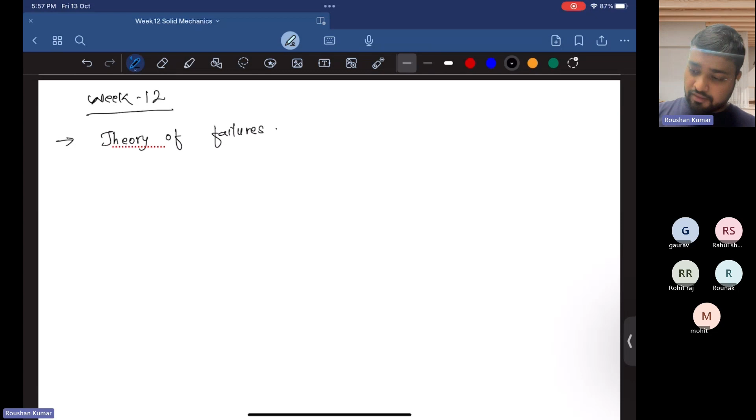So the first theory is the maximum principal stress theory. In this theory we have the maximum of lambda, that is lambda 1, is less than the yield stress of the material, i.e. the tensile yield stress of the material. So this is the maximum principal stress theory.

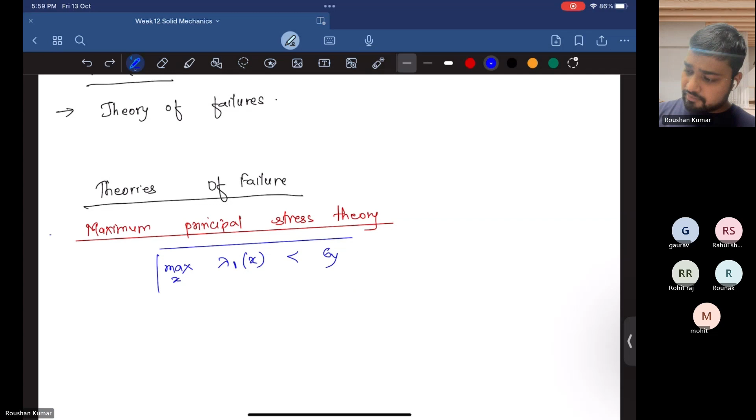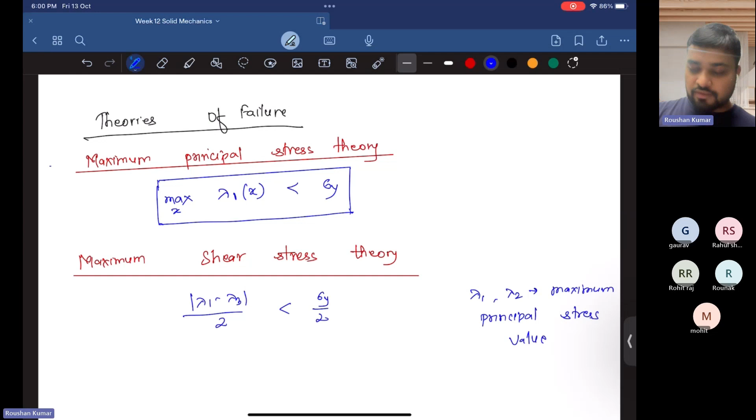Next is the maximum shear stress theory. In this theory we have lambda 1 minus lambda 3, divided by 2, is less than sigma y by 2. Here lambda 1 and lambda 3 are the maximum and minimum principal stress values. It can also be written in terms of yield stress in tension, or in terms of shear yield stress in shear, which is equal to lambda 1 minus lambda 3 upon 2 is less than tau y, which equals T into R upon J. So this represents the maximum and minimum principal stress values.

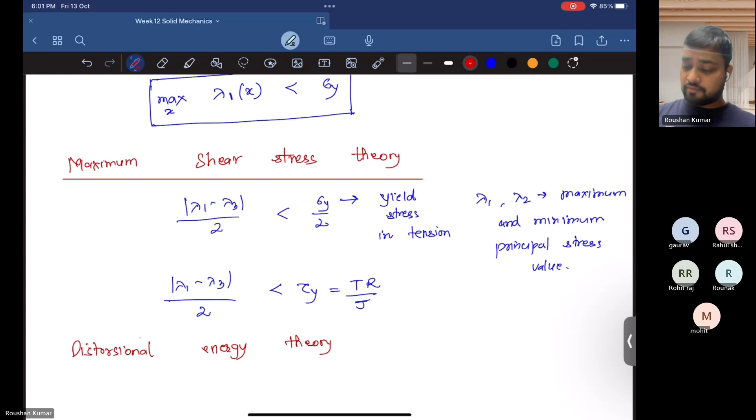The next theory is the distortional energy theory. In this theory, we write the expression in terms of distortional energy. Distortional energy per unit volume is given by total energy minus volumetric strain energy.

First, I will write the strain energy per unit volume. It is given by 1 by 2E times [sigma 1 square plus sigma 2 square plus sigma 3 square minus 2 nu times (sigma 1 sigma 2 plus sigma 2 sigma 3 plus sigma 3 sigma 1)]. This is the strain energy per unit volume, and the volumetric strain energy is given by a related expression.

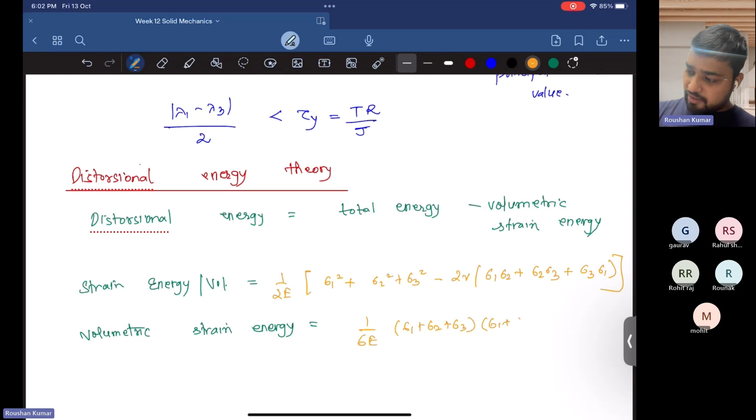Volumetric strain energy is equal to 1 by 6E times (sigma 1 plus sigma 2 plus sigma 3) times (sigma 1 plus sigma 2 plus sigma 3) times (1 minus 2 nu). Using these two relations, we can obtain the distortional energy. Finally, distortional energy is given by 1 plus nu by 3E times [sigma 1 square plus sigma 2 square plus sigma 3 square minus sigma 1 sigma 2 minus sigma 2 sigma 3 minus sigma 3 sigma 1].

So this is the distortion energy per unit volume. We can use this relation to calculate the yield value, that is the maximum stress value in the material. If only a uniaxial load is applied along one direction, the distortion energy becomes simply 1 plus nu by 3E times sigma 1 square, because the other principal stress values, sigma 2 square and sigma 3 square, become zero. Using the tension test, we can find the permissible tensile stress value.

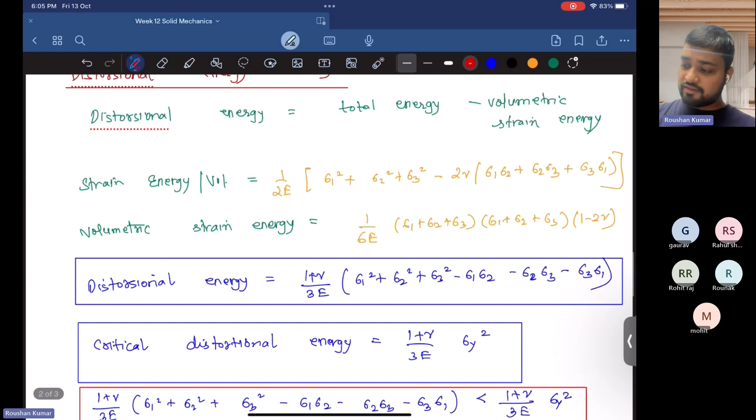We can also write in terms of yield stress in shear, just like the maximum shear stress theory. Using that, we can write: 1 plus nu upon 3E times sigma 1 square plus sigma 2 square plus sigma 3 square minus sigma 1 sigma 2 minus sigma 2 sigma 3 minus sigma 3 sigma 1 is less than 1 plus nu upon E times tau y square. So we can use this relation if we have given the yield stress in shear.

So this is all about the theories that we already discussed in the lecture. This is a problem solving session, so I have discussed only the formula part, meaning I only write the expressions here. For detailed derivation, you can look up into the lectures of this week.

The next thing discussed in the lecture, the last lecture of this week, is thermoelasticity. In that lecture, the concept of thermal stress and temperature coefficient has been discussed. I will just simply write the formula here. If you have to find the value of thermal strain, we can use one simple formula. So now we will be discussing thermoelasticity.

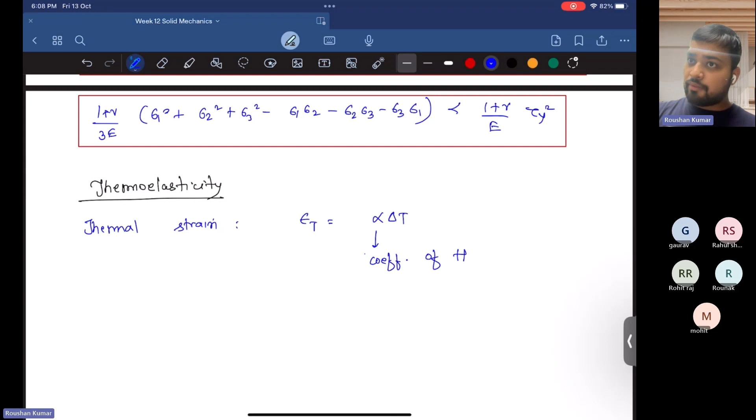So the thermal strain is given by this formula, that is thermal strain. Thermal strain, epsilon T, is given by alpha into delta T, where alpha is the thermal coefficient, that is, we can say, coefficient of thermal expansion, and delta T is the change in temperature. So thermal strain is given by this relation.

So the total strain is given by simply adding the value of the thermal strain. So to find the exact value of the strain happening in the body, it is given by mechanical strain plus thermal strain. So it is given by this relation.

Epsilon xx is given by 1 by E times sigma xx minus nu times sigma yy plus sigma zz, plus alpha times delta T. Similarly, epsilon yy is given by 1 by E times sigma yy minus nu times sigma xx plus sigma zz, plus alpha times delta T. Similarly, epsilon zz is given by 1 by E times sigma zz minus nu times sigma xx plus sigma yy, plus alpha times delta T. This is the final expression that we will use in the coming questions that I will discuss later on in this session.

So this is all about the week 12 theory part. In this week, two parts have been discussed: the first part is about the theory of failure, and the second part is about thermoelasticity. Based on these two topics, I will solve some problems right now, from basics to advanced, that will help you to solve the assignment problems covered in the solid mechanics course.

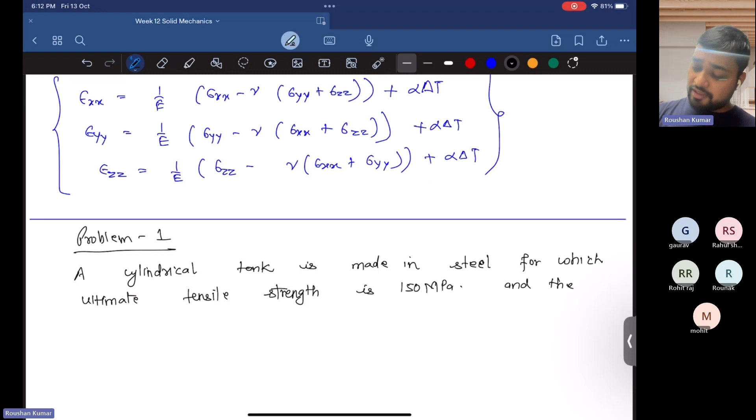For which the ultimate tensile strength is 150 megapascal, and the pressure inside the cylinder, and the pressure inside the cylinder is to be 1.3 megapascal.

So the question is, using theory of maximum principal stress, using theories of maximum principal stress, maximum shearing stress, maximum principal stress, maximum shearing stress, and distortional energy theory, and distortional energy.

Find the thickness of the cylinder. Find the thickness of the cylinder if diameter of the cylinder is: the first part is 1.5 meter, the second is 1 meter, the third is 0.5 meter.

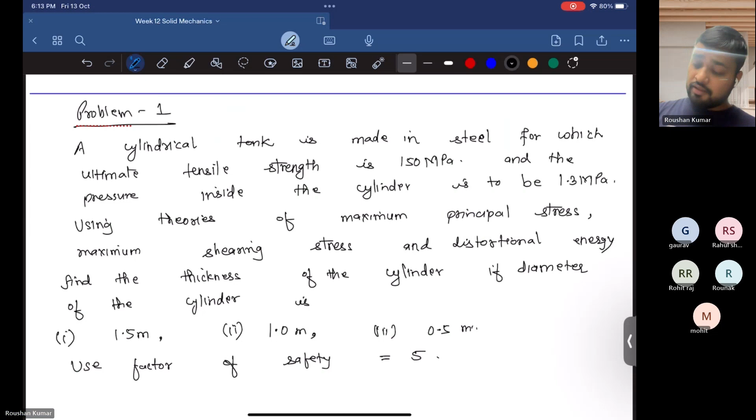So we have one cylindrical tank which is made of steel, which has ultimate tensile strength equal to 150 megapascal, and there is a pressure inside the cylinder of 1.3 megapascal. The question is, using the theory of maximum principal stress, maximum shearing stress, and distortion energy, we have to find the thickness of the cylinder.

And here we have given three diameters, that is 1.5 meter, 1 meter, and 0.5 meter, and for each we have to calculate the thickness of the cylinder. As we know that in a cylinder having internal pressure, we have two stresses: the first one is circumferential stress, and the second one is longitudinal stress.

So using that relation, we can simply find out the two tensile stresses. Both of these stresses are tensile in nature: the longitudinal stress and the hoop stress. So starting with the solution for this question.

Hoop stress is given by P into D upon 2T, where T is the thickness of the body, P is the internal pressure acting on the cylinder, D is the diameter of the cylinder. So what is P here? 1.3 megapascal. Diameter is D, times 2 into T.

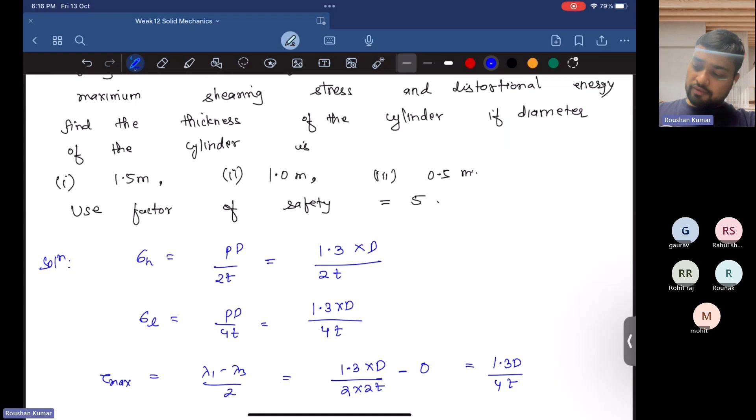Now we can see that the maximum shear stress theory, lambda 1 minus lambda 3 upon 2, and the maximum principal stress theory both give the same result here. Why is it same? Because both the stresses are in the same quadrant, that is the first quadrant, and the minimum principal stress here is 0. So we can say that the value of thickness coming out from the principal stress theory and the shear stress theory are both the same, because both stresses are in the first quadrant and the third stress, that is the minimum principal stress, is 0.

So we can write that in the first quadrant, where sigma H and sigma L both are positive, the maximum principal stress theory and the maximum shear stress theory are the same.

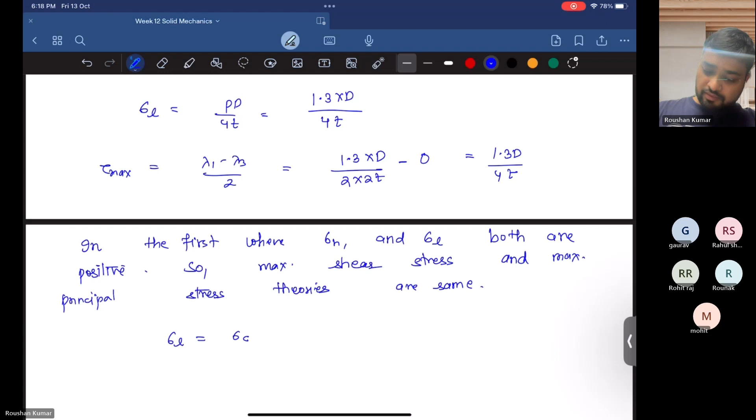So we can say that here longitudinal stress is equal to circumferential stress, and circumferential stress is given by ultimate tensile stress upon factor of safety, which is equal to 150 upon 5. The factor of safety is 5 mentioned there. So it is given by 30 megapascal. This is the yield stress in tension, or we can say shear, because here both the theories give the same result.

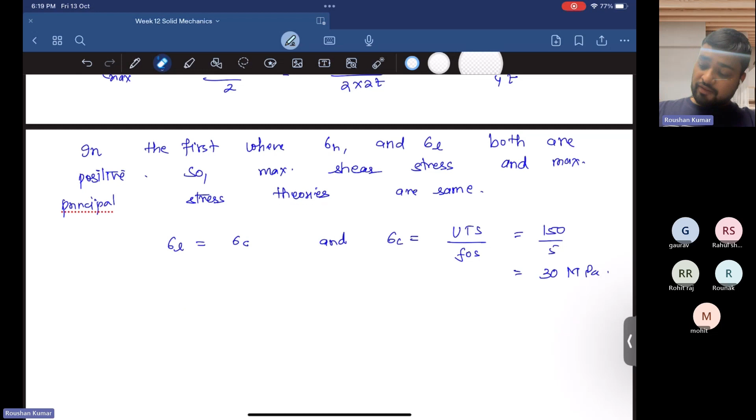Now we have the equation 1.3D upon 2T is given by 30 megapascal. Using maximum shear stress or maximum principal stress, both are same here, so I am using maximum principal stress theory. It is given by lambda 1 less than or equal to sigma Y. Lambda 1 is 1.3D upon 2T. Equating with 30 megapascal, it becomes 1.3D equal to 60T, and from here, T equal to 1.3D upon 60.

Now we have three diameter values, so we can use all the diameter values one by one. First case is for diameter equal to 1.5 meter, which is nothing but equal to 1500 mm. So T equal to 1.3 into 1500 upon 60, which is 1.3 into 25, so it becomes 32.5 mm.

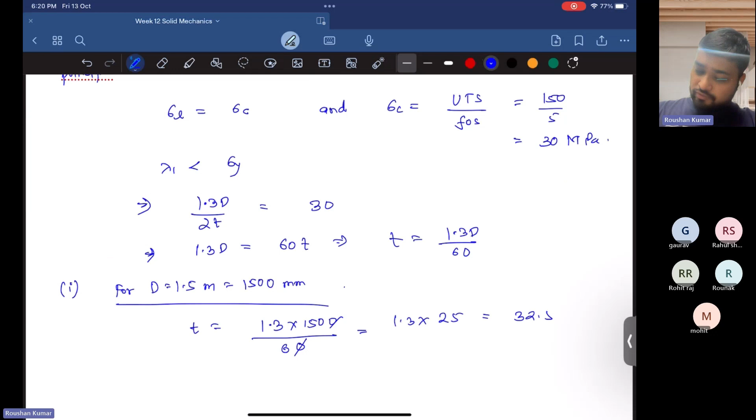The next case is for diameter equal to 1 meter, that is 1000 mm. So T equal to 1.3 into 1000 upon 60, which is approximately coming out to be 21.7 mm.

The next case is for diameter equal to 0.5 meter, that is 500 mm. It is given by T equal to 1.3 into 500 upon 60, which is coming out to be 10.8 mm.

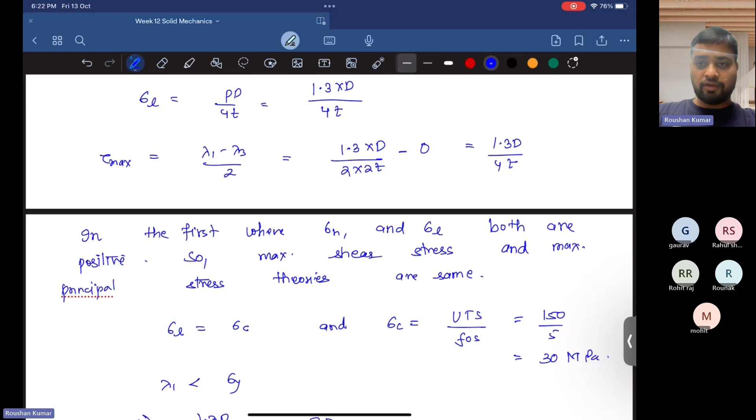So yes, this is all about the first part. The second part of this question uses distortion energy theory. So the question is using distortion energy theory, using distortional energy theory.

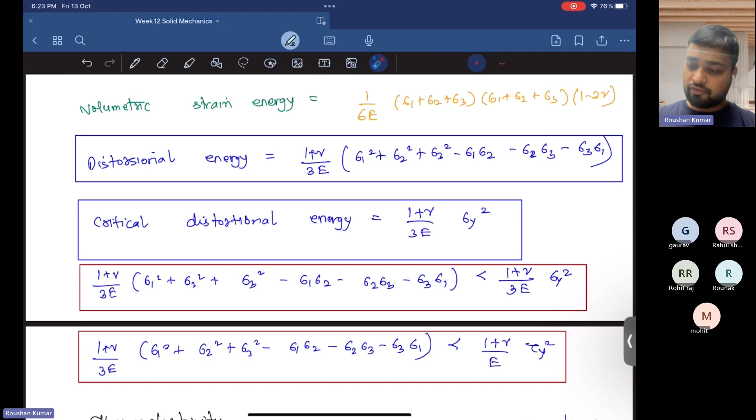So here we have only two principal stresses. The third principal stress is 0 here. So that's why we are using the concept sigma 1 square minus sigma 1 sigma 2. If you use that relation, as I discussed earlier, if you put the value of sigma 1 square and sigma 3 square, since sigma 3 square is 0, then only this will remain in the expression: sigma 1 square plus sigma 2 square minus sigma 1 sigma 2 is less than or equal to tau y square.

So sigma 1 square minus sigma 1 sigma 2 plus sigma 2 square equals sigma y square. And here we have calculated the value of sigma y, that is 150 upon 5.

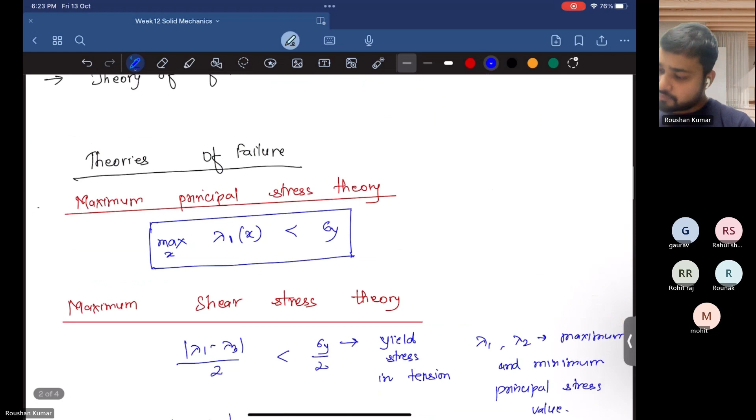We can also call it sigma y for your clarity, because in the above expression I am using only sigma y, so that's why I'm using a sigma y value. So it is given by sigma y. So sigma 1 square is 1.3d upon 2 sigma y, minus half into 1.3d upon 2 sigma y whole square, plus 1 by 4 into 1.3d upon 2 sigma y whole square equal to...

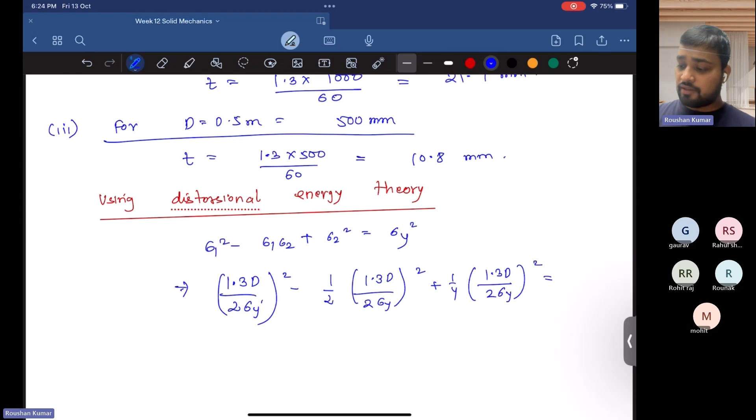So what I am doing here is simply using that relation: 1.3d upon 2t and 1.3d upon 4t. So 1 by 4 of 1.3d upon 2 sigma y, and I take sigma y value from the right hand side to the left hand side, and the value of t going from LHS to RHS. So what is left from the RHS is t square. If we take common 1.3d upon 2 sigma y whole square, the remaining thing left here is 1 minus 1 by 2, and from here it's 1 by 4, equal to 0.317 d upon 30 whole square.

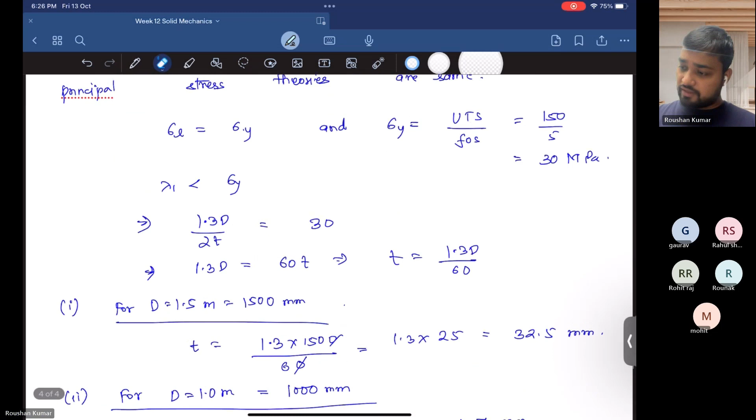Okay, so it comes from here. It comes from here. Sigma c value, that is equal to... so it is t square. And after solving this, we can find the value of this one: 0.317 d upon 30 whole square equal to t square.

Now we have to calculate the value of the thickness for each diameter value given in the question. So for diameter equal to 1.5 meter, that is 1500 mm, T1 equal to, from here we can use the relation. T1 is coming out to be 28.15 mm.

For D equal to 1 meter, that is 1000 mm, T1 is coming out to be 18.77 mm. And for D equal to 0.5 meter, that is 500 mm, T1 is coming out to be 9.40 mm.

So this is the final value of the thickness coming from this relation. This is the final answer for this question. In this question, we have three parts: we have to find the value of thickness using maximum shear stress theory, maximum principal stress theory, and distortion energy theory. Because sigma 1 and sigma 2 are in the same quadrant and sigma 3 value is 0, we can say that maximum shear stress theory and maximum principal stress theory yield the same value of thickness. However, using distortion energy theory, we find the value of thickness for each diameter value given in the question.

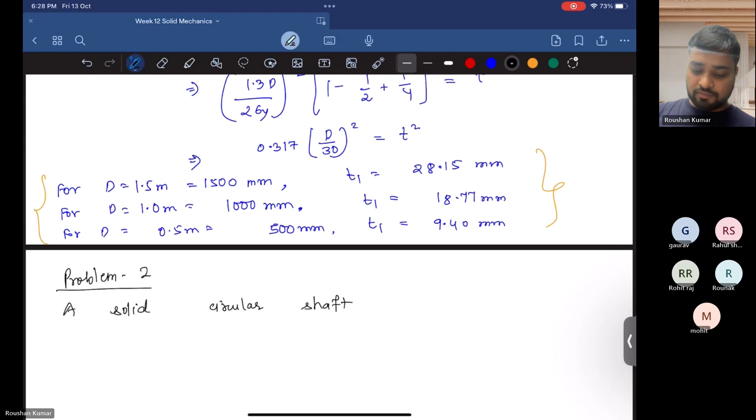This problem involves a solid circular shaft subjected to a bending moment of 3 kilonewton meter and a torque of 1 kilonewton meter. The shaft is to be made of carbon steel, for which sigma y equals 480 megapascal and tau y equals 265 megapascal.

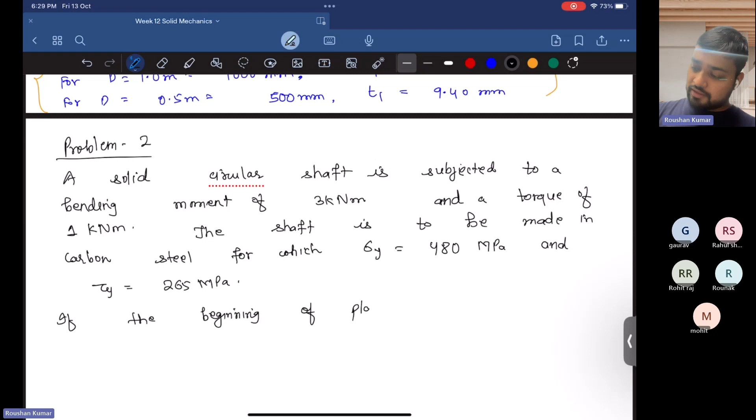The question is: if the beginning of plastic deformation is to be avoided, calculate the shaft diameter using maximum principal stress theory, maximum shear stress theory, and distortion energy theory.

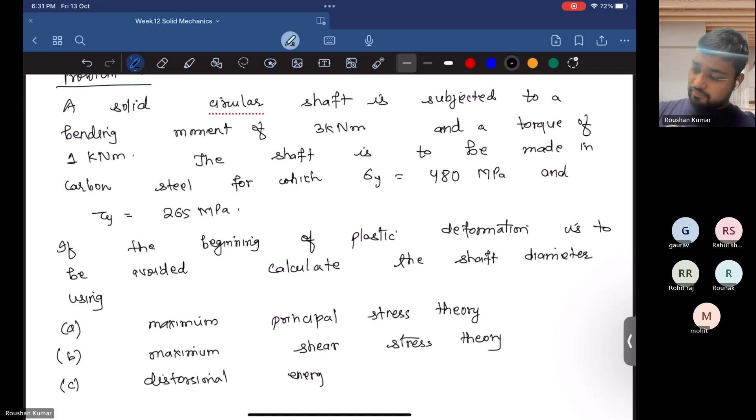The first part of this question is using maximum principal stress theory, then maximum shear stress theory, and distortion energy theory. So we have this shaft.

Here is a bending moment applied, that is M, and here is a torque also applied, that is MT. From here also torque is applied, MT. This is the center of the shaft, and D is the diameter of the shaft.

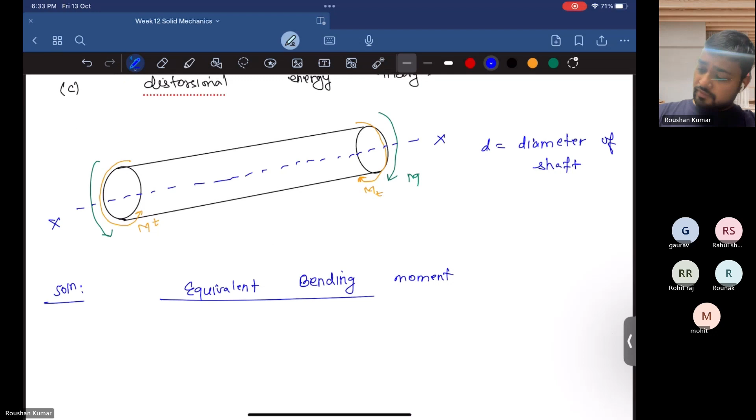First we have to find the equivalent bending moment and the equivalent twisting moment. The equivalent bending moment is given by the relation: equivalent bending moment equals half of M plus the square root of M squared plus MT squared, or half of M minus the square root of M squared plus MT squared.

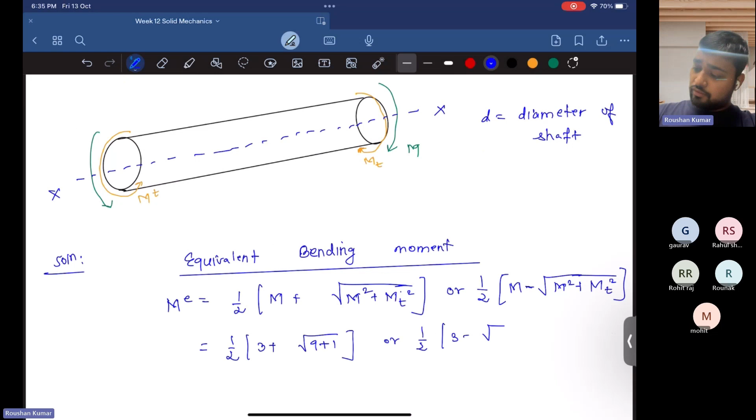Here M, the bending moment, is given as 3 kilonewton meter, and MT is given as 1 kilonewton meter. So it is given by half of 3 plus root over 9 plus 1, or half of 3 minus root over 9 plus 1. Finally it comes out to be 3.04 kilonewton meter, or minus 0.04 kilonewton meter.

Using the equivalent bending moment, we can find the value of the maximum principal stress, sigma 1, which is given by sigma 1 equal to My upon I. Here y is D by 2, and I is pi D to the power 4 upon 64, giving 32 M equivalent upon pi D cube, since one D cancels out. So 32 into M equivalent bending moment, which is 3.04 into 10 to the power 3, upon pi D cube, equals 31 into 10 to the power 3 upon D cube.

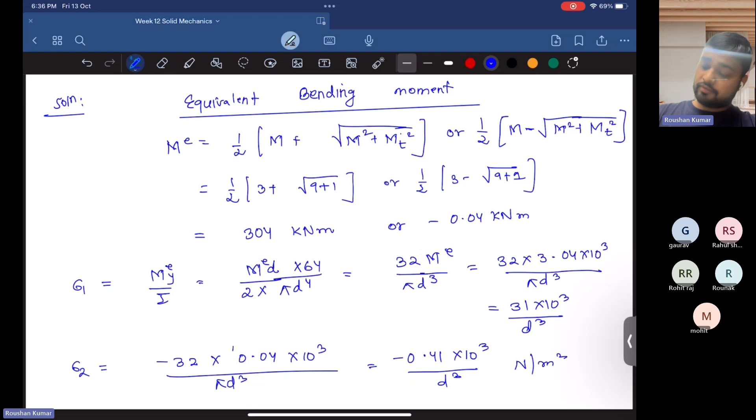The second principal stress is given using the second equivalent bending moment, that is minus 32 into Me, where Me is 0.04 into 10 to the power 3, upon pi D cube. So it comes out to be minus 0.41 into 10 to the power 3 upon D cube Newton per meter square. This is the value of the second principal stress coming from the equivalent bending moment.

Now we have to find the value of the equivalent torque. Equivalent torque is given by the square root of M squared plus MT squared, which equals root of 9 plus 1, that is root 10, approximately equal to 3.16 into 10 to the power 3 Newton meter.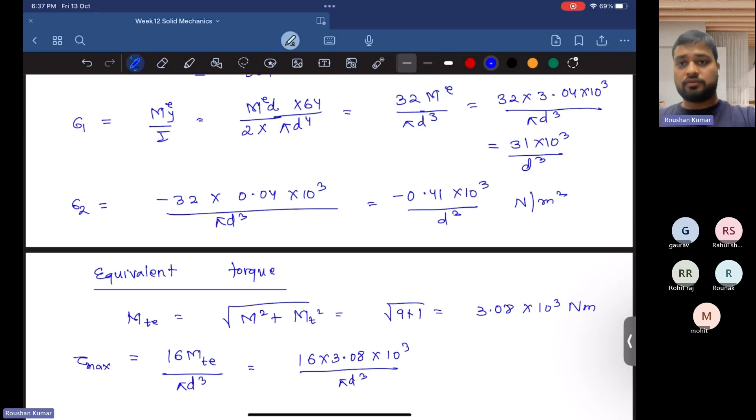From here we can find the maximum shear stress. Tau max is given by 16 times the equivalent torque upon pi D cube, which equals 16 into 3.08 into 10 to the power 3 upon pi D cube. Calculating this, it comes out to 15.7 upon D cube into 10 to the power 3 Newton per meter square.

Now we have to use two different theories. The first one is maximum shear stress theory, and the second one is maximum principal stress theory. So we're first using the maximum principal stress theory.

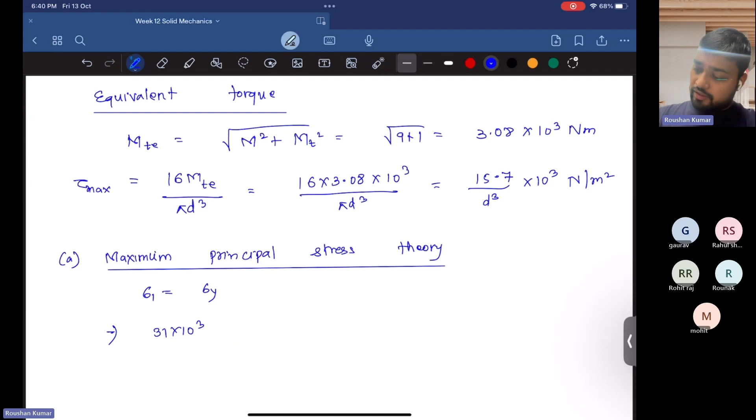That is, sigma 1 equal to sigma y here. Sigma 1 is given by 31 into 10 to the power 3 upon D cube, equal to sigma y. The value of sigma y is given as 480 megapascal, but it's in Newton per mm square and we need Newton per meter square, so we multiply by 10 to the power minus 9, giving 480. From here we can find the value of D, which comes out to be 40.12 mm. So the final diameter from the maximum principal stress theory is 40.12 mm.

Now using the maximum shearing stress theory.

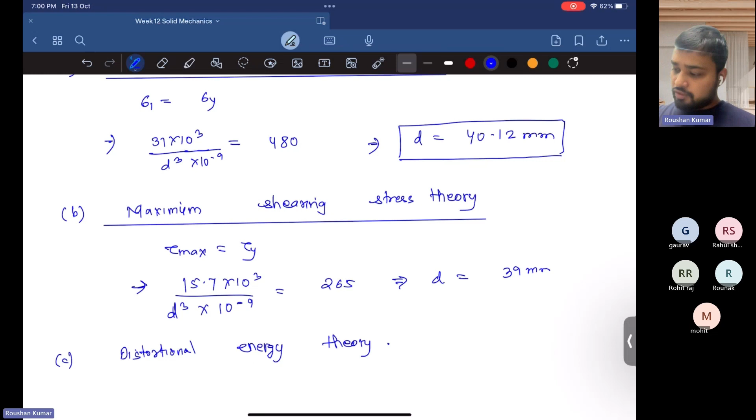Now we have to also use the third part of this question, that is we have to use the distortional energy theory. So it is given by distortional energy theory. Using distortional energy theory, we have the expression sigma 1 square minus sigma 1 sigma 2 plus sigma 2 square is equal to sigma y whole square.

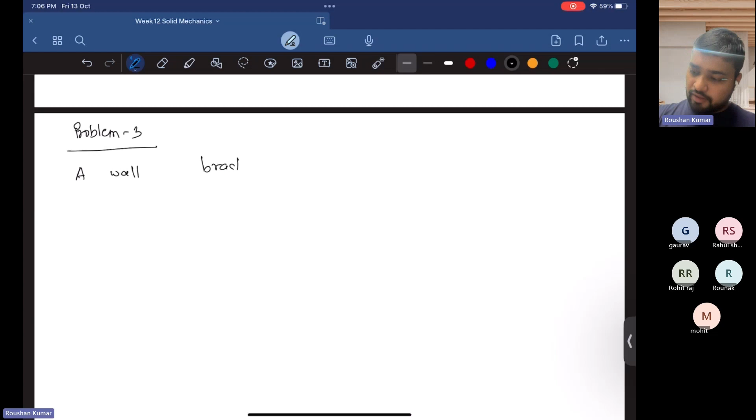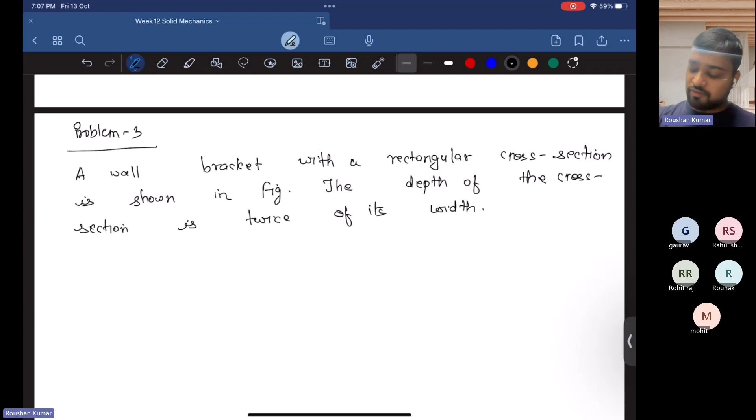So the question is: a wall bracket with a rectangular cross section is shown in figure. The depth of the cross section is twice its width. The force P is acting on the bracket at 60° to the vertical.

The force P is 5 kilonewton. The material of the bracket is gray cast iron, of yield stress 200 megapascal, and the factor of safety is 3.

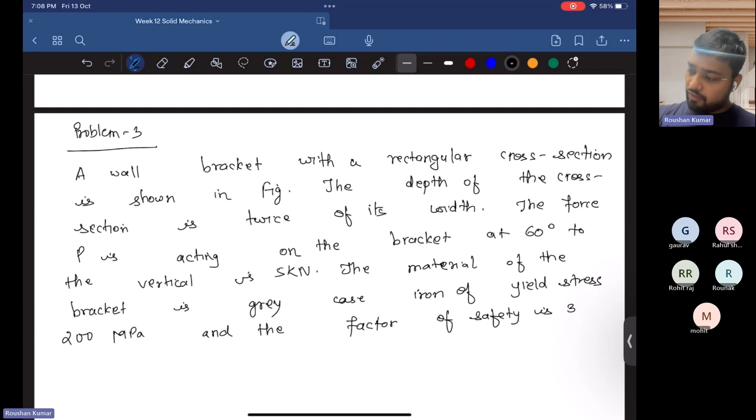Determine the dimensions of the cross section of the bracket. Assume maximum normal stress theory of failure.

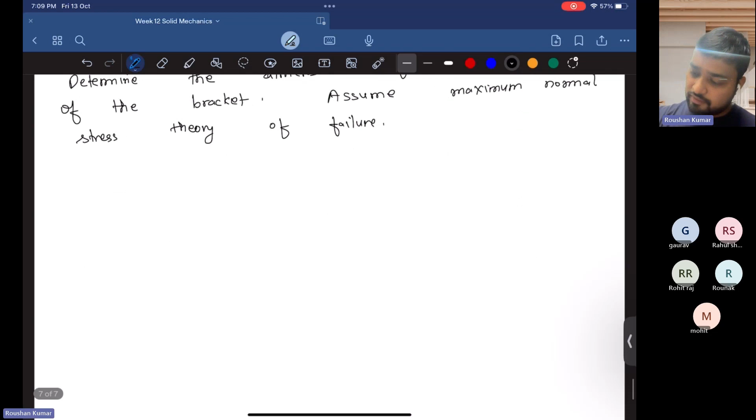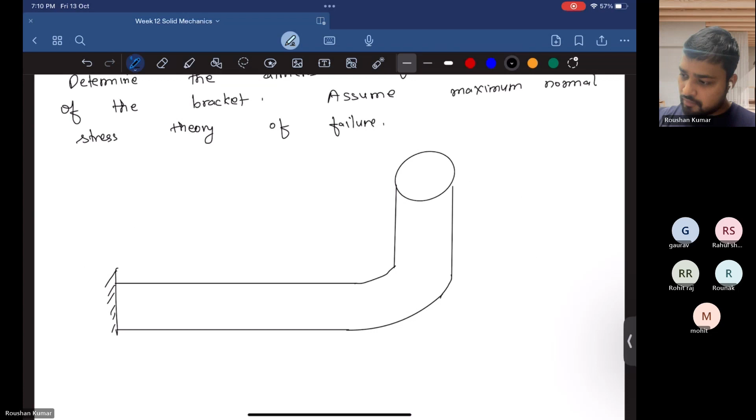So I'm repeating the question. A wall bracket with a rectangular cross section is shown in the figure. So I'll draw the figure first. Here there is a load acting.

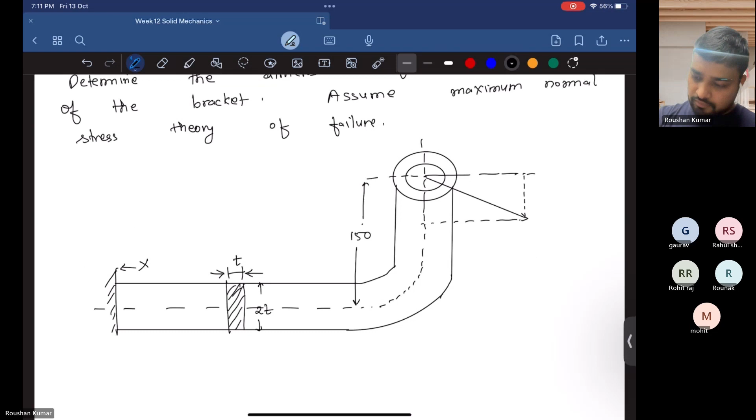A load P is acting. This length is 150 mm, so this is a center. This is a section of thickness 2T, this thickness is T. This point is A, this is the X section. This length is 300. This angle is 60 degrees.

So this is a wall bracket. The depth of the cross section is twice its width. That is, the depth is twice the width. So if the width is T, the depth of the cross section is 2T.

The force P is acting on the bracket at 60 degrees. You can see here a force P is acting, which is at 60 degree from the vertical, and it is 5 kilonewton, as given in the question. The material of the bracket is gray cast iron with yield stress 200 megapascal, and the factor of safety taken is 3.5.

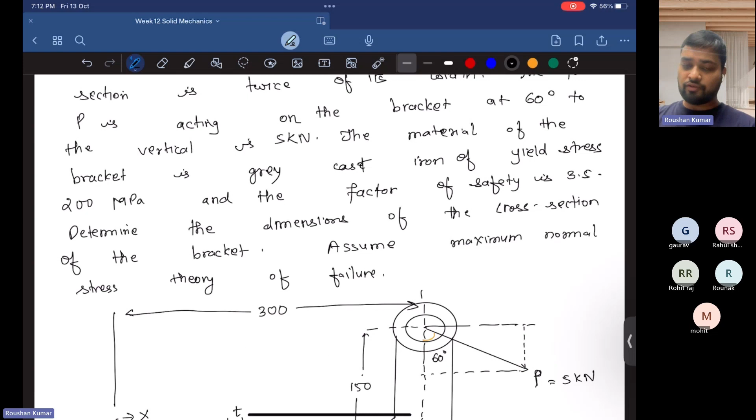Determine the dimension of the cross section of the bracket. So we have to find the width and the thickness of the bracket. Here we have to assume the maximum normal stress theory of failure. So this is a bracket.

So we can simply write the given values here. First the load P, which is equal to 5 kilonewton. The second value is SY, that is the yield stress, that is 200 megapascal. Next is factor of safety, which is given as 3.5. And next is depth upon width ratio, which is given as 2. So these are the given values in the problem.

So first we have to find the permissible stress value. Permissible stress, that is sigma y, is given by sigma max, which is given by Sy upon factor of safety, which is 200 upon 3.5, which is approximately equal to 57.14 Newton per mm square. So this is the value of permissible stress.

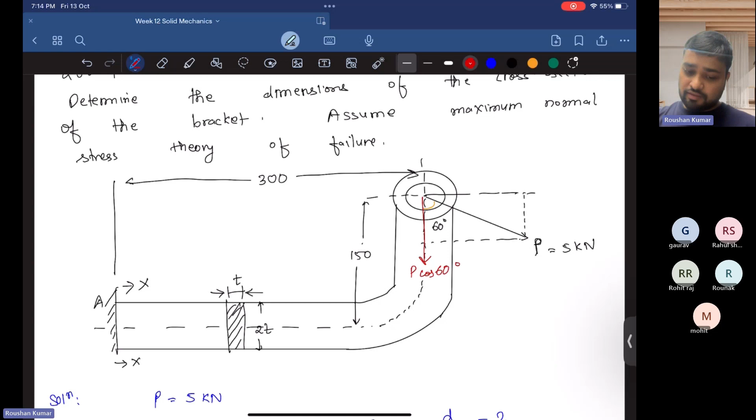Now, because our load P is acting at an angle of 60 degrees from the vertical, we have to calculate the direct bending and tensile stresses. So first we break the component of P into two components, the horizontal and the vertical component. The vertical component will become P cos 60, and the horizontal component will become P sin 60.

So let's start with the horizontal component, PH, and we name these PH and PV, the horizontal load component and the vertical load component. Horizontal component PH equals P sin 60, which is equal to 5000 sin 60. Sin 60 is root 3 by 2. If we calculate this, it comes out to be 4330.13 Newton.

Next is the vertical component, PV, which is equal to P cos 60. Cos 60 is 1 by 2. That is, it comes out to be 2500 Newton.

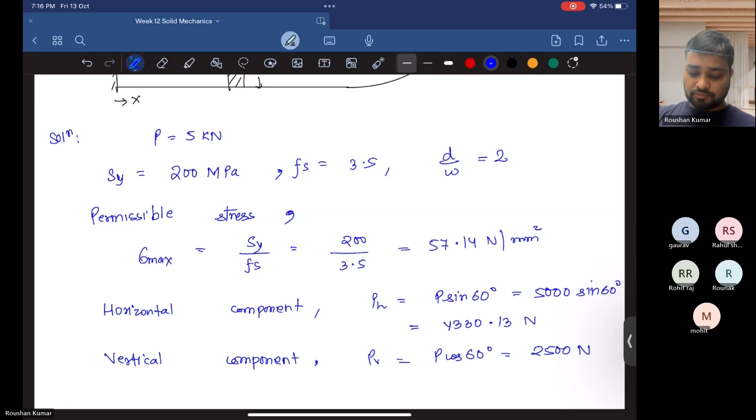Now, the bending moment at this section. If you want to find the bending moment at this section, it will create a bending moment of P cos 60 multiplied by this distance, that is 300, and it will create a bending moment of P sin 60 multiplied by this distance, that is 150.

So the bending moment at the section XX is given by MB equal to, first using PV multiplied by the perpendicular distance from the section, that is 300, so P cos 60 into 300. So it's PV into 300 plus PH into 150.

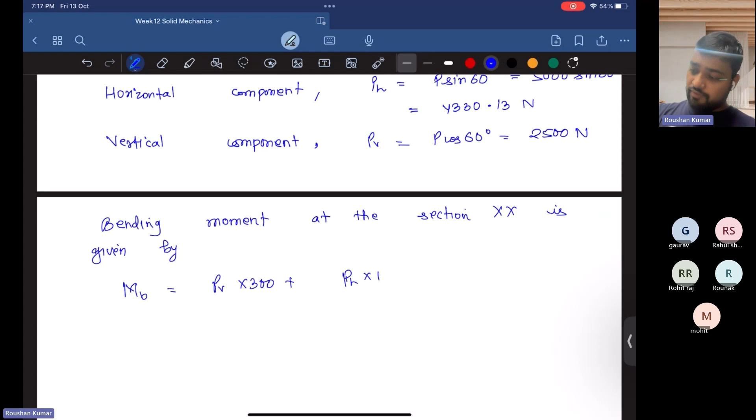We already found the value of PV, that is 2500 into 300, plus 4330.13 into 150. Finally, the value coming from the calculation is 1399.52 into 10 to the power 3 Newton mm, because the distance is in mm, 300 mm and 150 mm. So the bending moment about section XX is given by 1399.52 Newton mm into 10 to the power 3.

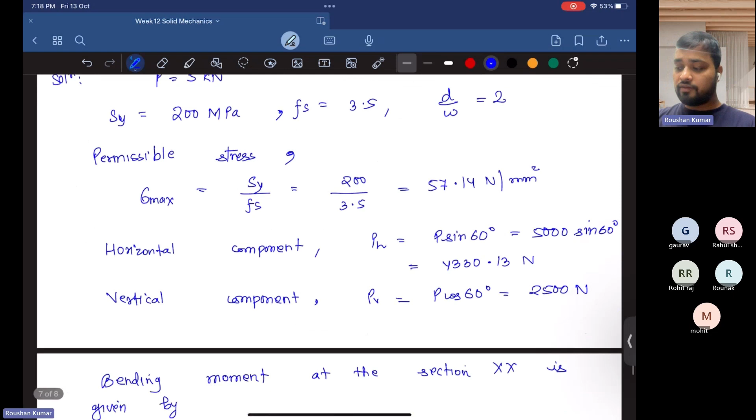Now we have to find what the question is asking for, the dimension. So for the dimension, we have to find the value of permissible stress. For this, we have found the value of bending moment, and now we find the value of permissible stress. So sigma b, that is bending stress, is given by MB.

Okay. So sigma B, that is bending stress, is given by MB y upon I.

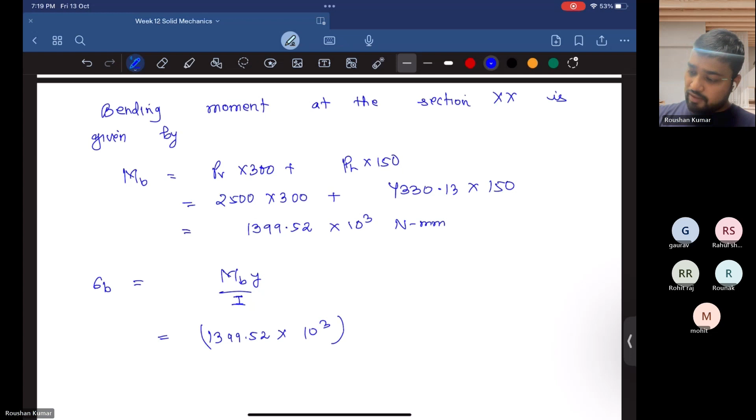So what is Y here? You can see the distance of the cross section from the mid plane, from the centroid, is T. So it becomes T, and I is given by BH cube upon 12. So B is T here because width is T, thickness is 2T, so it's 2T cube upon 12.

Now after calculating this, we get the value: 2099.28 into 10 to the power 3 upon T cube, Newton per mm square. So this is the final value that is coming out to be.

Now here we can see that due to this load P, we have two bending moments occurring. The vertical component yields a bending moment about this axis.

So it's given by P cos 60 into 300 mm, 300 mm, and the horizontal component also yields a bending moment about the x-axis.

Here you can see that the horizontal component of this force, that is PH, creates a tensile stress in this section, and the vertical force PV creates a shear stress in this section. So we also have to find the permissible stress due to stretching and permissible stress due to shearing.

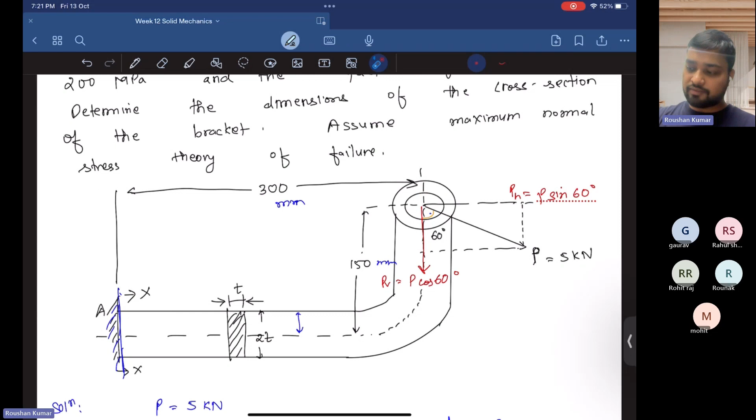Let's do this. So direct tensile stress due to component PH is given by sigma T, which is equal to PH upon A.

What is the horizontal component? PH is given by, we already calculated that, PH is given by 4330.13 upon area. Area is width into thickness, that is T into 2T, that is 2T square. So it's given by 2165.07 upon T square, Newton per mm square.

So that's the direct tensile stress. Now the vertical component, that is PV, induces shear stress at this section XX. So we also have to calculate that shear stress.

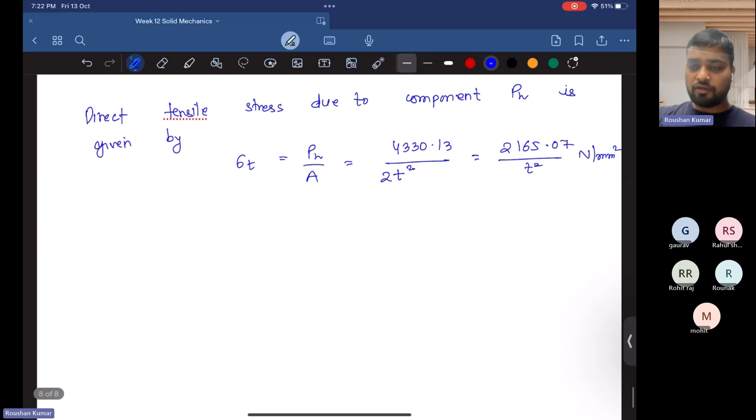But for now, we have neglected that shear part because we have to use the maximum normal stress theory. We have neglected the shear stress due to PV, that is the vertical component of load P, because it is very small.

Now we have to calculate the value of maximum stress, that is the total stress. So using maximum principal stress theory, we have total stress equal to, or less than, permissible stress, that is sigma max.

It is given by sigma B plus sigma T, which is now equal to sigma max, to find out the value of the thickness and the width.

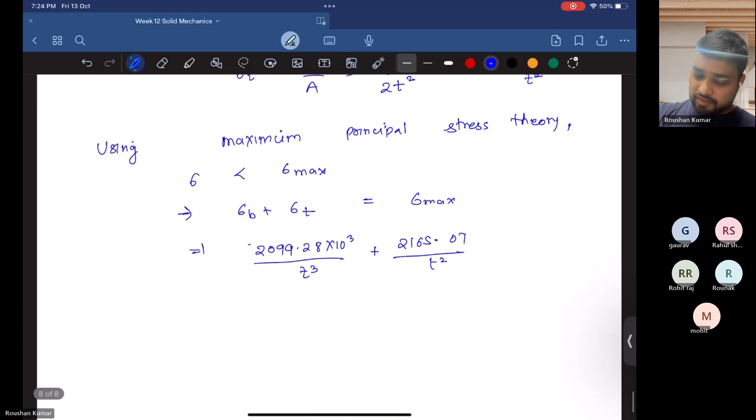So by substituting: 2099.28 into 10 to the power 3 upon T cube, plus 2165.07 upon T square, sigma T is given by T square, is equal to sigma max, which is already obtained above, equal to 57.14.

So after solving this, we come out to an equation in terms of T. It's a cubic equation: T cube minus 37.89 T minus 36739.24 equal to 0.

Okay, if we solve this, we finally come out to a value. So we can solve this cubic equation, to really get the value of T, that is the thickness of the bracket. You can solve this equation using a scientific calculator. So I am solving this equation using a calculator, so let's solve this.

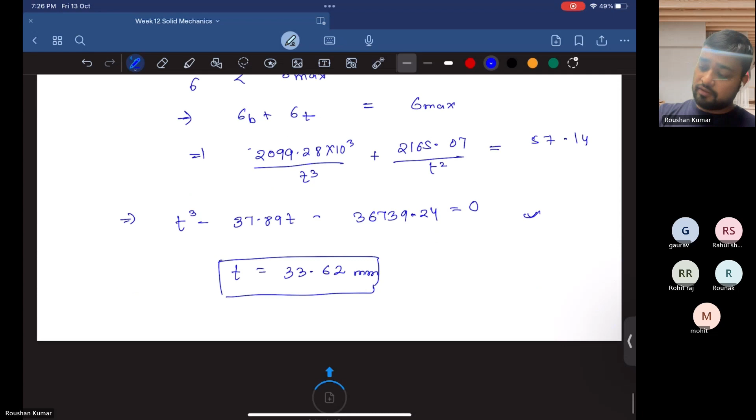So this is the value of the thickness. So width is given by, so thickness value is T. We have already found the value of T, which is 33.62 mm. So this is all about this question.

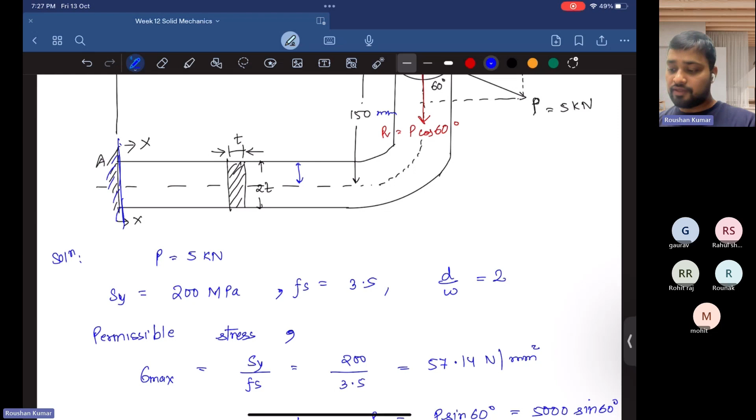So in this question, what we have done is simply start from the basics: we calculate the permissible stress. For that, we need the moment and the permissible tensile stress already acting in the bracket. Here we have a load inclined at angle 60 degrees from the vertical, and due to this load, we have two bending moments, due to the horizontal component and due to the vertical component. We found the bending moment due to these two load components. Then we have one tensile stress component due to this horizontal component force at section XX. We also have a shear component, but we have neglected the shear stress because it's a very small value, so we have neglected that part.

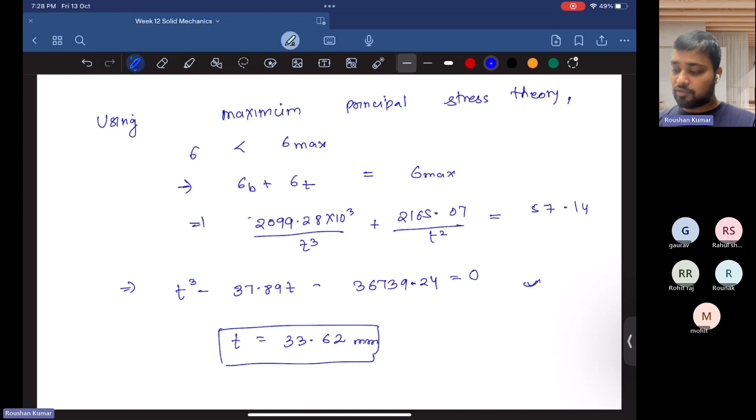And after that, we find the value of bending stress and the tensile stress, and we have compared it with the maximum stress using the maximum principal stress theory. Using the relation, we come out to be a cubic equation in terms of T. Using a scientific calculator, we find the roots of this equation, which comes out to be a positive root of 33.62 mm. So this is the final answer for this question.

Now move on to the next question, which is also a very good question. Of course, this is also a very complicated and very general question of a shaft. So I'm writing this question, that is problem number 4.

Problem 4. The question is, the shaft of an overhang crank subjected to a force P of 1 kilonewton is shown in figure.

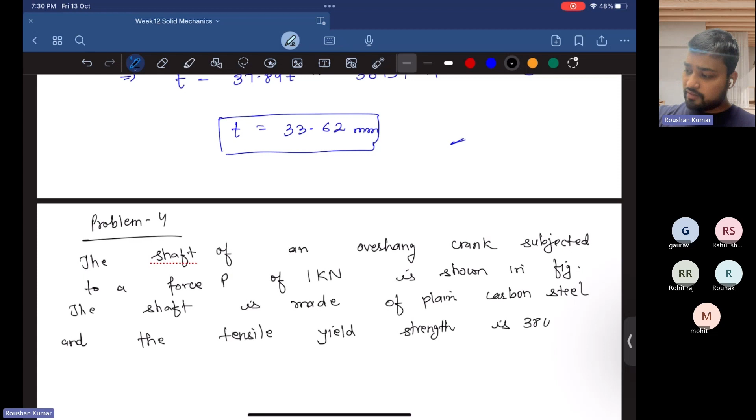The shaft is made of plain carbon steel, and the tensile yield strength is 380 Newton per mm square. Here the factor of safety is to be taken as 2.

And the question is, determine the diameter of the shaft using maximum shear stress theory.

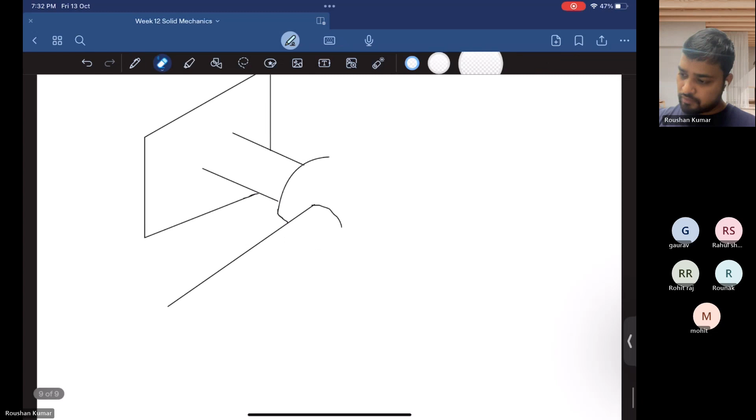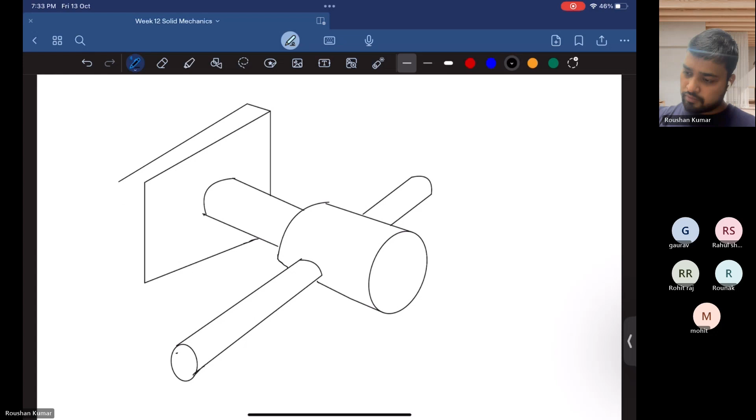Okay, so I'm drawing the figure, so you can draw with me. This is the axis we have in this figure. So this is y-axis, this is z-axis, and the center is along x-axis. Now we have the length. So here a load is applied. First I am drawing the center. So this distance is, let me draw with other color, this distance is 250. Then here a load P is applied, which is at a distance of 500 from this one.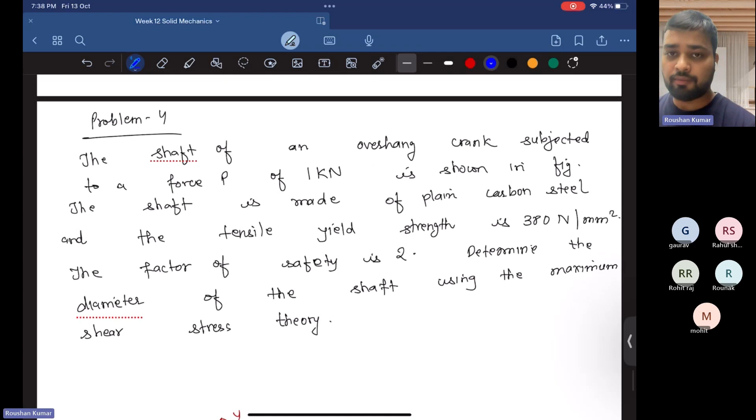I'm coming to the solution part. The shaft, I'm repeating the question one more time: the shaft of an overhang crank subjected to a force P of 1 kilonewton is shown in figure. Here we have a figure shown. You can see a shaft here, which is made up of plain carbon steel, and the tensile strength is 380 Newton per mm square. The factor of safety to be taken here is 2. So the question is determine the diameter of the shaft using maximum shear stress theory. So we have to find the diameter of the shaft using maximum shear stress theory.

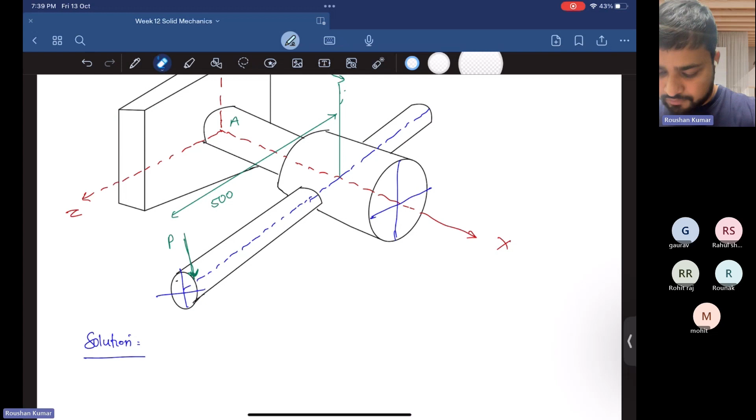So let's begin this problem. So here we have the given load which is equal to P equal to 1 kilonewton. So given here that P equal to 1 kilonewton, SYT that is in tension is given as 380 Newton per mm square. It's already mentioned in the question.

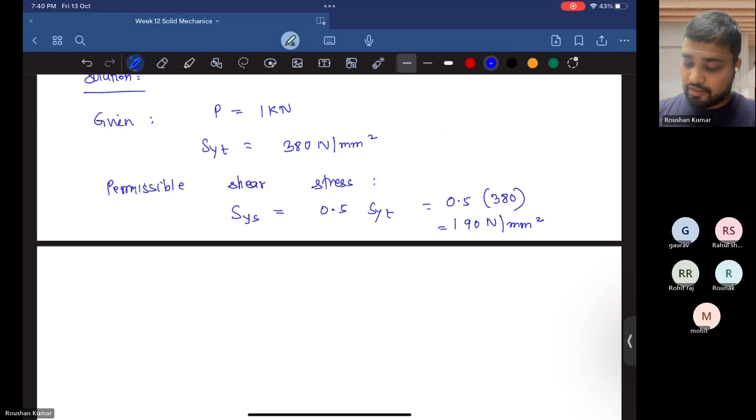Now we have to find the permissible shear stress. Permissible shear stress is given by S X Y, which is given by S Y S. Permissible shear stress is given by 0.5 of SYT, which is given by 0.5 of 380, which is equal to 190 Newton per mm square. So this is the permissible shear stress, given by this equation.

So the permissible shear stress is tau max equal to S y s upon factor of safety. Here factor of safety is given as 2. So it becomes 190 upon 2, which is equal to 95 Newton per mm square.

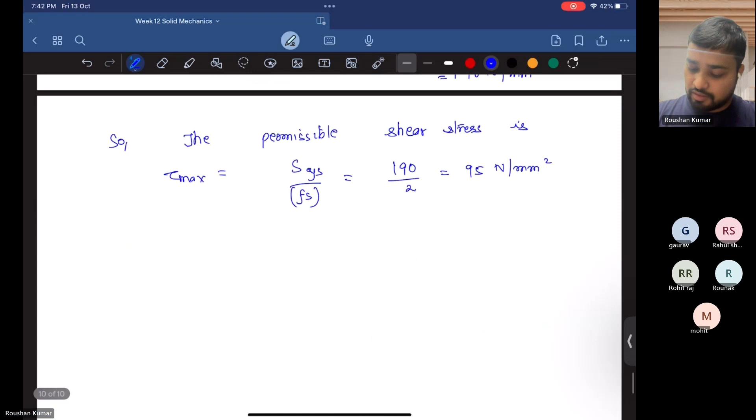Now to find out the diameter of the shaft, we have to calculate the torsion and bending shear stress acting about this point. For that we have to calculate the bending and torsion moment, that is torque. So bending moment about this point.

Next is torque, given by P into 500, which is equal to 1000 into 500, which is equal to 500 into 10 to the power 3 Newton mm.

Now we have to calculate the bending stress. Sigma B is equal to Mb y upon I. We already calculated the value of Mb, which is equal to 250 into 10 to the power 3 into d by 2. Why d by 2? Because the distance from the centroid to the topmost point is d by 2, since the total diameter of the cross section is d. And I is pi d to the power 4 upon 64.

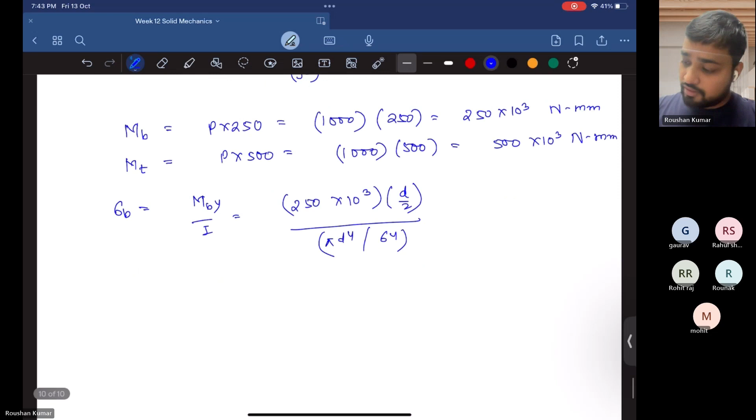So after putting in the values and calculating this expression, we finally get 2546.48 into 10 to the power 3 upon d cube, Newton per mm square.

Now coming to the torque, the shear stress is given by Mt into r upon J. So it is given by 500 into 10 to the power 3 into d by 2 upon pi d to the power 4 upon 32, which comes out to be 2546.48 into 10 to the power 3 upon d cube, Newton per mm square.

Now we have to calculate the maximum shear stress, using the maximum shear stress theory. We can find the value of maximum shear stress using Mohr's circle, because here we have both the bending stress and the shear stress.

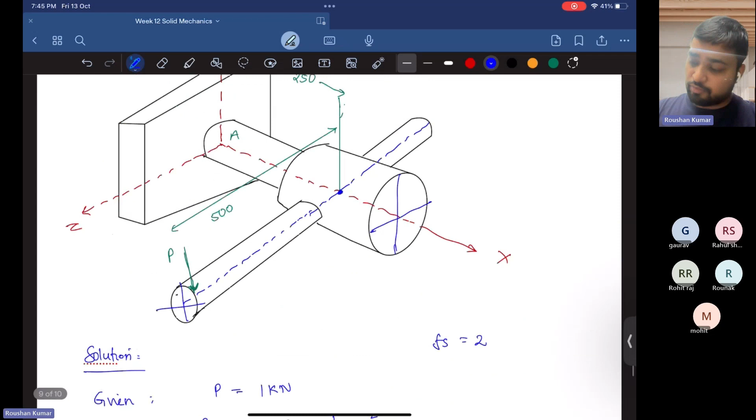At point A, sigma x equal to sigma b, which is equal to 2546.48 into 10 to the power 3 upon d cube. Similarly, tau equal to tau xz equal to tau zx, which is equal to 2546.48 into 10 to the power 3 upon d cube. Both of these are in Newton per mm square.

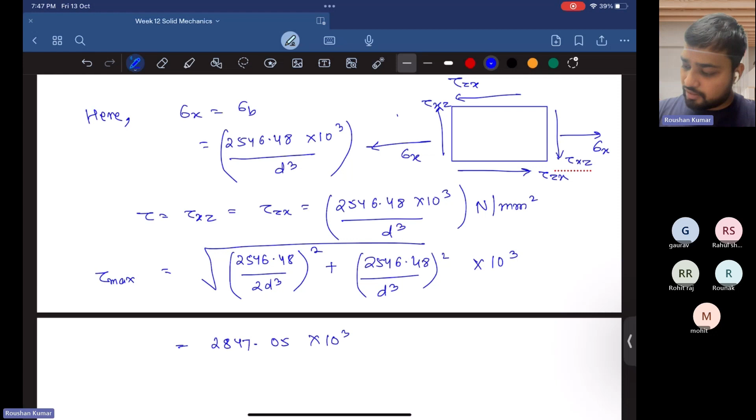Now using the Mohr circle, tau max equal to root over of 2546.48 upon 2d cube whole square plus 2546.48 upon d cube whole square, into 10 to the power 3. So it comes out to be 2847.05 into 10 to the power 3 upon d cube. This is the final expression for the maximum shear stress value.

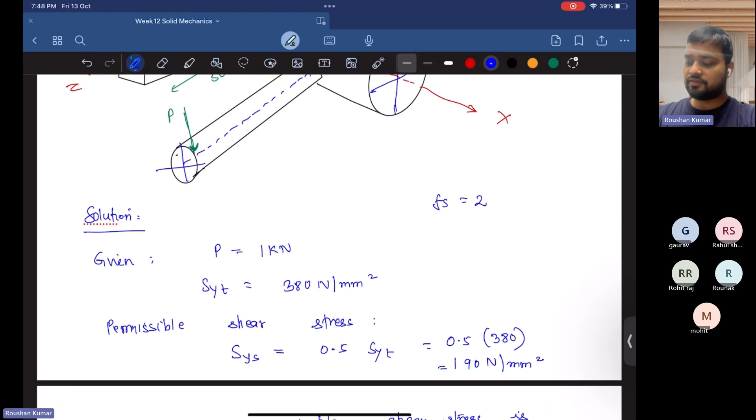Now it's already mentioned in the question that SYT, the yield stress in tension, is given as 380 Newton per mm square, and we have to use the maximum shear stress theory. So we already found the value of permissible shear stress, SYS, which is equal to 190 Newton per mm square.

Now using this concept, we can find the value of the shaft diameter using maximum shear stress theory. We have tau max equal to 95... that is 2847.05 into 10 to the power 3 upon d cube.

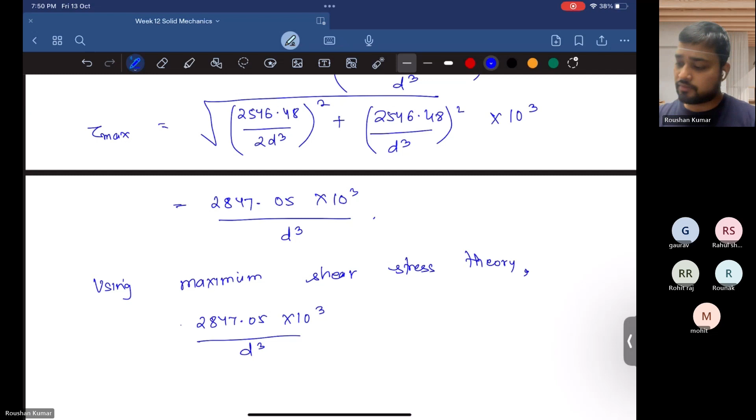It finally comes out to be d is equal to, d coming out to be 31.06 mm. So this is the final answer that we have for this question.

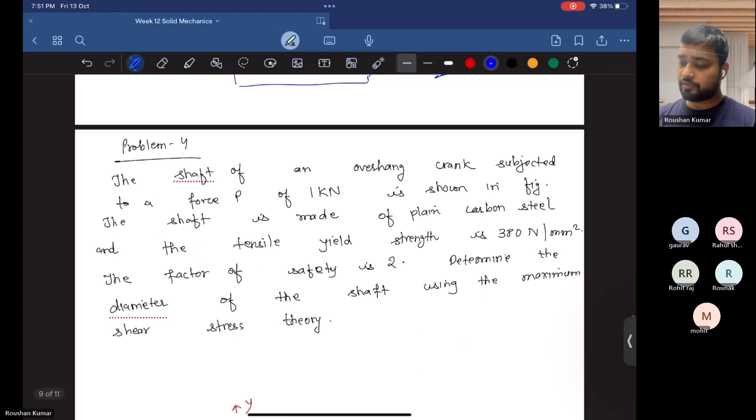So in this question, we were asked to solve a problem based on the theory of failure. Today we have solved 4 problems based on the theory of failure, and all these 4 questions are very good questions based on this theory.